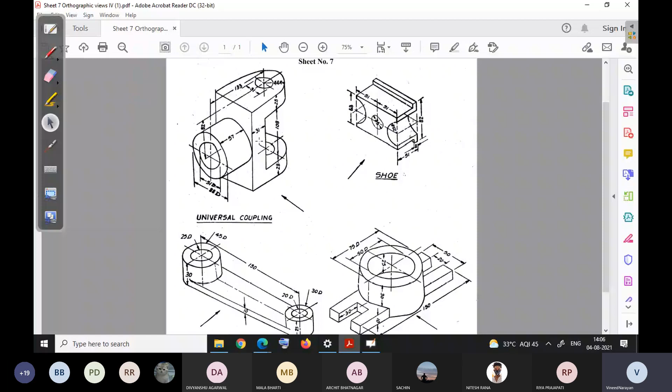Okay. The front view will be the projection of this view. So what are the dimensions available to us? So the height of this coupling can be found out by adding this 108 plus 28 plus 28. Okay. And the width is given as 31, or this thickness is given as 31. Now it will move here.

So we can start with this base. So I can draw first the line of, remember, always drawing the important edges with a thick line and projection lines. Okay. So this is one side and this is the top portion. So the height is, or we can mark it later.

Height of this line is 108 plus 28 plus 28, 56 plus 108, 164. So this height will be 164, and this length of the top line will be, it's not known directly. So what we can do is we can complete that part later.

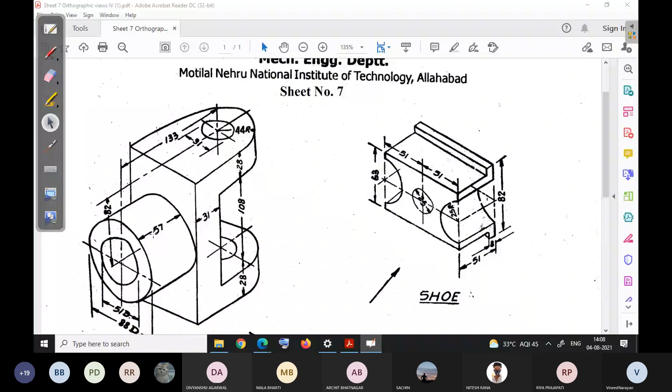We can draw this circular part, or this annular part. It is 57 in length and its diameter is 88. Diameter is given as 88. So this height also will be 88, and length is 57. So this should be at the center.

Because you know that this is 82. Okay, total height is 164. So one half of 164 is 82. So we can confirm that the center of the circle, or the center of this annular shaft or hollow shaft, is the center of the other part of this right hand side. So we can draw a center line. Center lines are also thin lines.

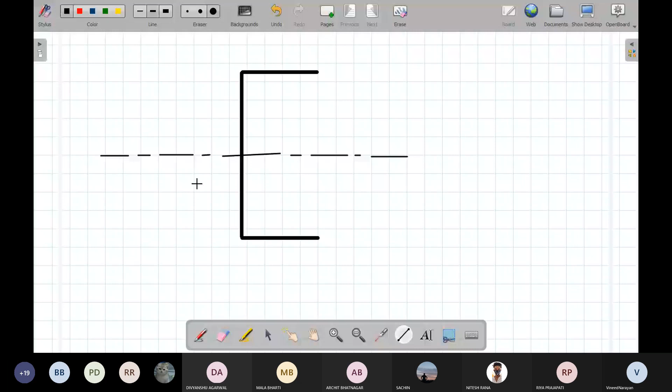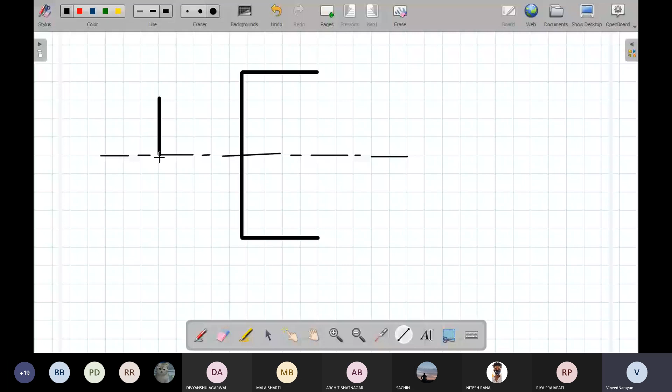In this fashion, we draw center line, and now we have to draw that circular part. So its projection will be a rectangle, and from this point, the length of that circular portion is 57 and diameter is 88. So we can draw 44 from this and 44 towards bottom side. Make this more. The height is 44. Make the second joint.

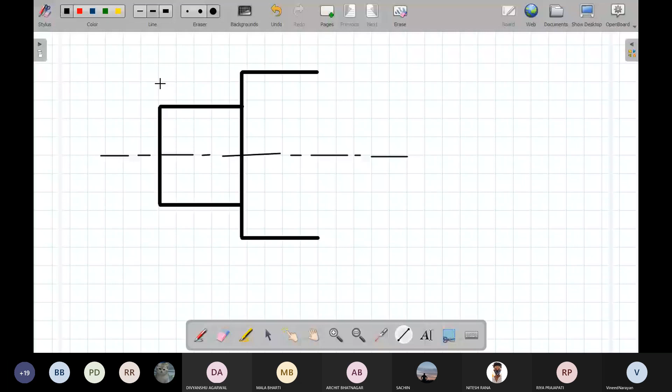So this thickness and this length is 57. Okay. And this diameter we can represent in top view. This is 57, and we can also show the hidden part, or this inner circle is the hidden part. Okay. This is hidden because we cannot see from this side. We will be able to see only the edges of outer circle. Okay.

So that hidden circle diameter is 51. Okay. So radius you can take 25. Actually it is 25.5, but you cannot take 0.5 because your scale or the measuring device cannot, or the least count of your scale is 1 mm. So it is difficult for you to represent 25.5.

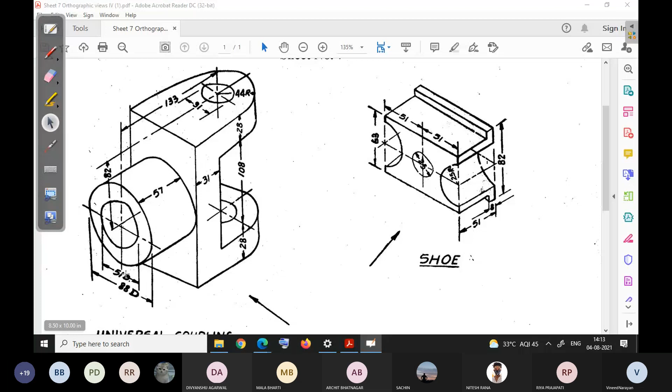Here you can see diameter is 51. So to draw this circle, you have to use a compass of radius 25.5. So 0.5 we cannot find out from your scale. For that you need either some other scale which can show 0.5, or least count is either less than or equal to 0.5. So don't write 0.5 in your drawing if your least count is 1 mm. Okay. So these things you must remember.

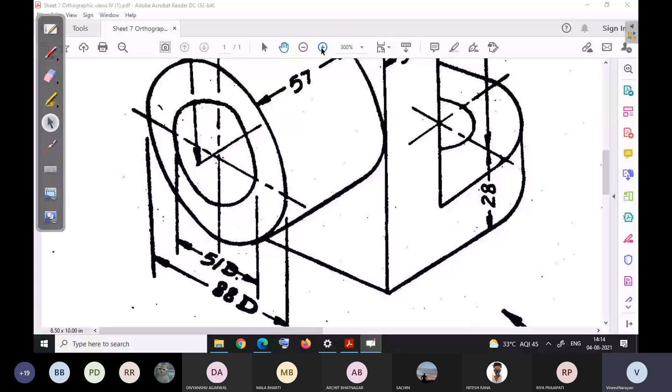You cannot measure 0.5 with the scale which is having least count of 1. So in this case, we can take 25 from bottom and 25 from the top, and can draw the hidden part. Okay, later we can mark it as 51 itself. Don't do it. Don't write it as 50.

Now other measurements which is given in the question is 133 from this edge. So the center of this circle is 133 mm from this edge, and both the circles are in same axis. So you can take

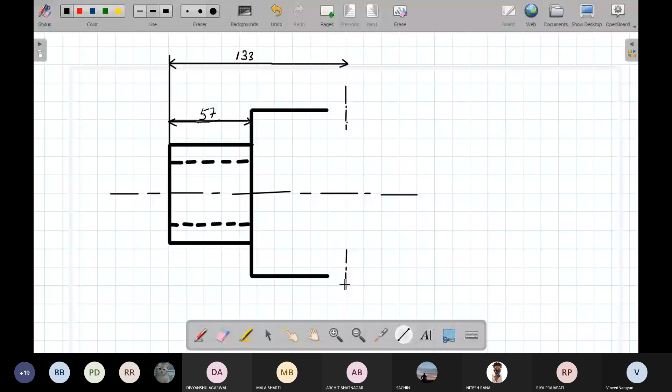let's say this is 1 circle given to us. Now you can draw center line which is passing through the center of the circle, and also you can draw to here. So this is only up to the center of the circle. Then after that you have to draw another 44 mm because it's given that radius of this part is 44. So you can draw another 44.

Now this height is 28 and you can draw complete. And this one is 31. So if you know that is 31, you can draw a line. Okay.

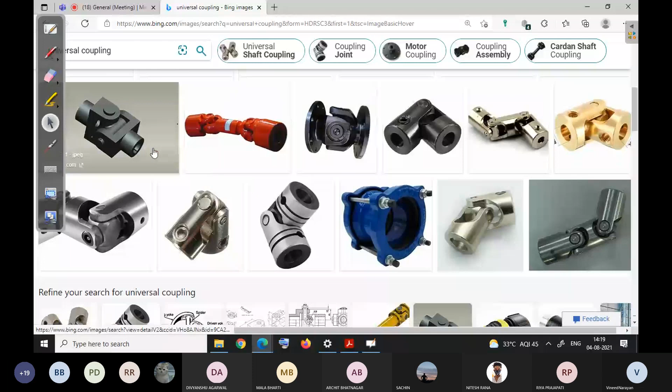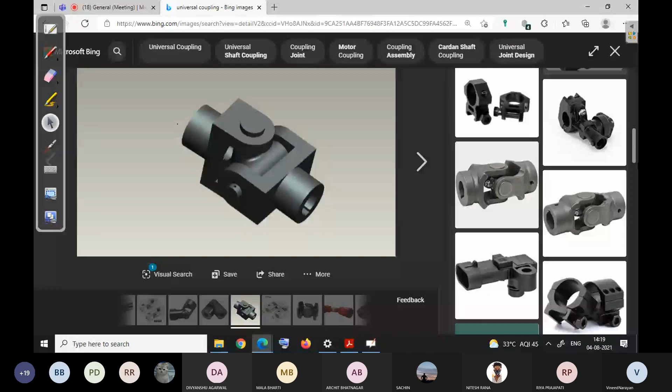So this is actually a coupling. You want to see the device. It's something like this. It's used to transmit power from one shaft to another shaft which are intersecting. So we are drawing only a part. Later we will do complete assembly in the later part of the course. There are different types of couplings. That's what we are trying to draw here. Only one part.

Now here this hidden part also you can draw. The circle. Its diameter is 31. So this 31 you can easily take with your scale from one point. The center portion should pass through 15, half of it. And all these measurements you can represent. Remember, measurements also need to be shown with the thin lines.

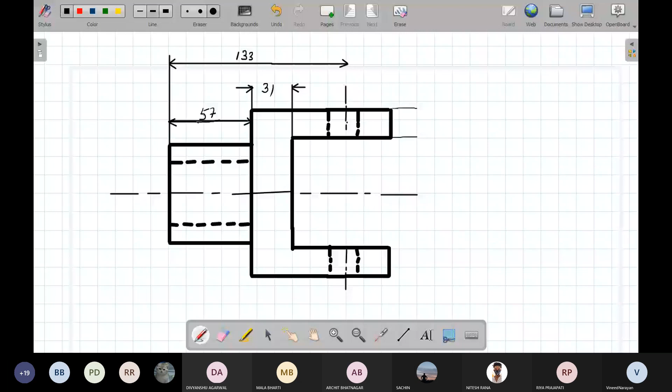This is 31. This one is 28. So we need to show minimum number of dimensions so that this can be replicated. So in the top view, or you can always start from top view because it's easy to draw with top view in this particular example. So if we start with the top view, in this case I can project, or if you are not projecting, you can always start with the top view and then you can project to the front view. That is also okay.

That will be very easy if you draw two parallel lines. Let's take these two parallel lines, very thin lines, and pick these two lines 88 mm apart, and this thickness is not given, but you can assume that this circle and this line are tangent. Okay, then this will also be 88. Okay,

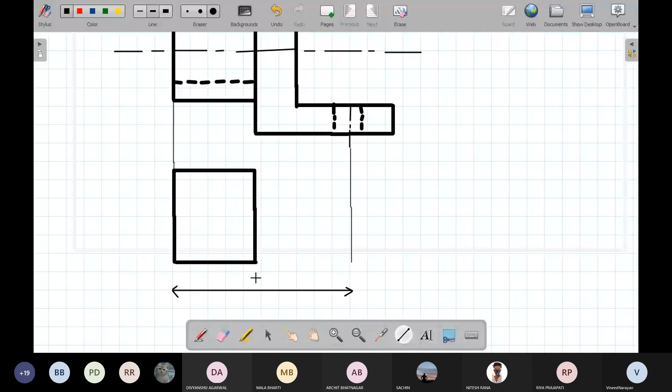then so if we start from top view, in that case we need to know this, and that is given as 133. After that we can complete this portion up to here. So this total length is 133 and height is

Please use scale for dimensioning line also, since some students are still using freehand. This is 88.

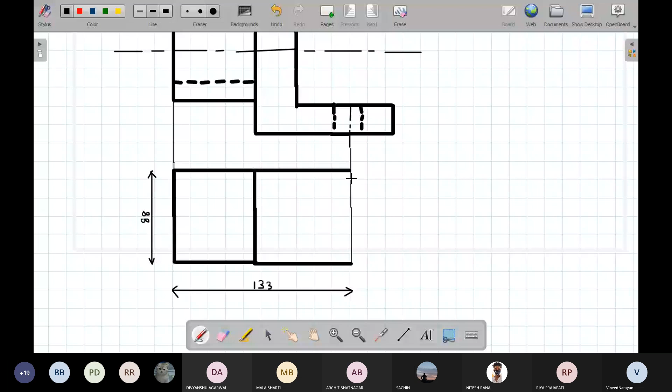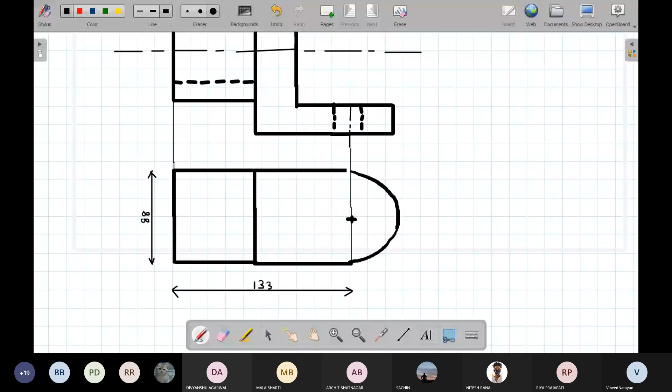So please follow uniformity. If you are writing above line, write always above line. Now you can take a compass and draw an arc or semicircle of radius 44. And then the inner circle diameter is 31. And that also you can draw. And then you can show the center line, which is the line of symmetry.

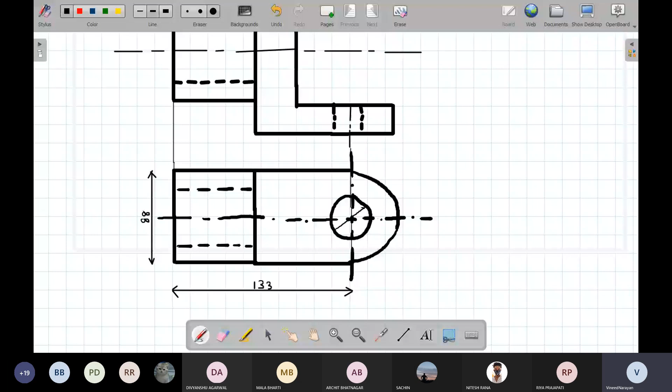The central line is also passing through the center of the circle. So you can show here also hidden bar. So in this case you can show the diameter of the circle in this fashion. It was around 31. And right here, 31 D. Then the radius of this part, 44. Yes, for R.

So after drawing top view, you can project to front view also. There is no problem in that. That will be better, I guess, because drawing this part is easier compared to the front view. So after drawing this top view, you can project it. You can project this line. You can project the tangent. Since I have not used a drafter, they are not becoming parallel, but you have to use instruments.

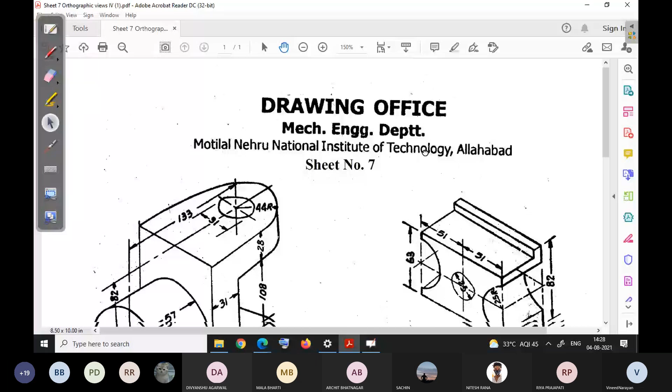Same way you can draw any side view. Either it can go with left hand side view or right hand side. So I guess things are clear with these two pictures itself, top view and front view. But for more clarity, you can add one side view also. Mentioned in question. Okay, you can draw front view, top view, and one side view, either left or right. So draw such a way that minimum number of hidden lines appears.

So if you draw in the first case right hand side view, that is looking from this side, it will create a lot of hidden lines. That is not recommended. So it's better you look from left side, and more edges are visible if you look from the left side. So better draw left side. So yes, we need a side view also because whether this part is circular or rectangular is not very clear from these views. So we need to go for left hand side view. So you can always project now because you have both the views. Projection lines are very thin lines.

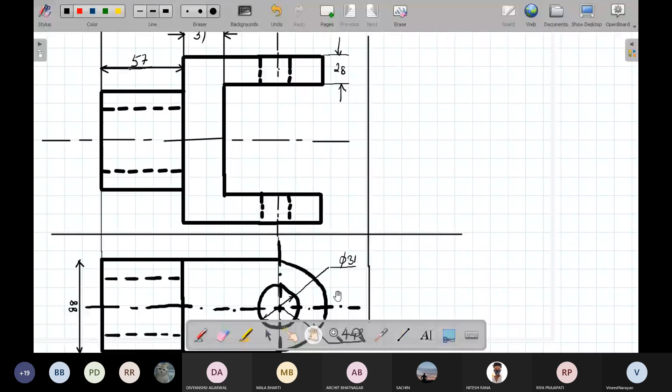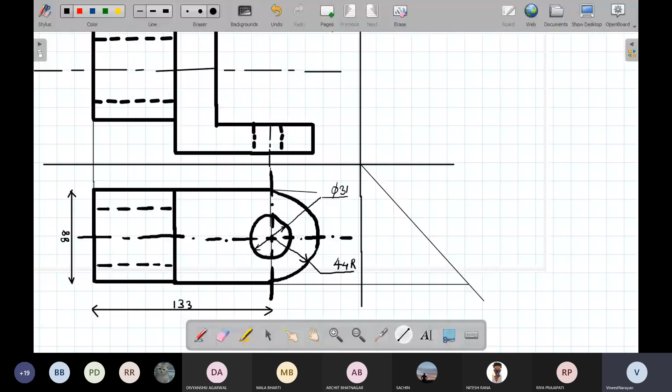For projection, you can draw a 45-degree line. Okay. And we have sufficient number of lines. Project. So center will come somewhere here. So this is one center line. And complete it. Okay. And other hidden parts also we can do.

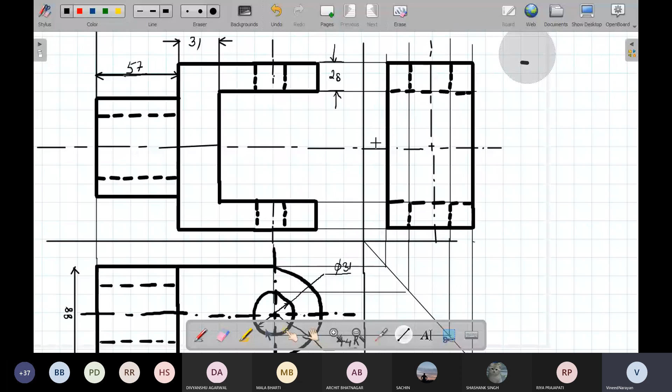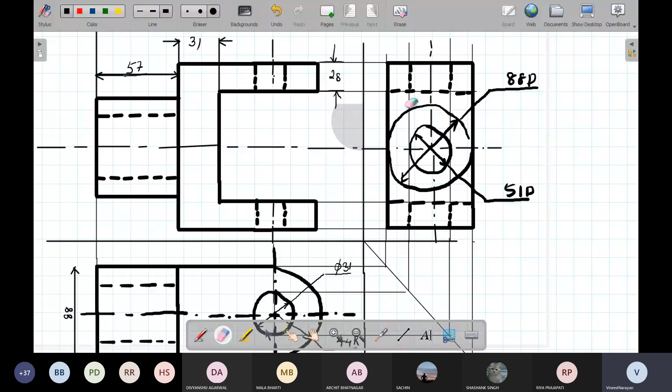The circle we can show like this, and also the inner circle. We can show the diameter here also. 88. And the inner one is 51. Okay. So far, any doubt in drawing this? So this dimension line should not be this thick. The left hand side view which I have drawn should be thin.

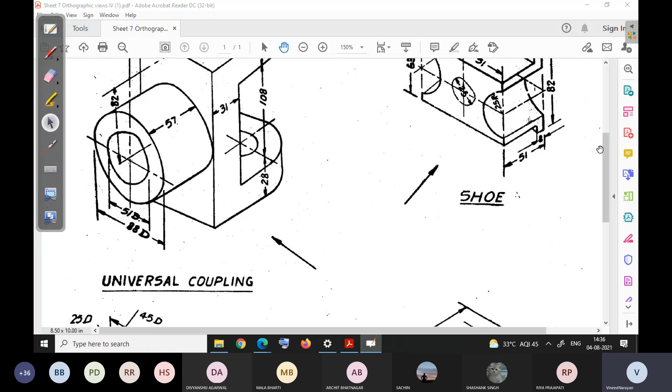I think most of the parts are shown in this. And I have also returned the previous sheet, one of the sheets. Please go through that, and if you suspect you deserve more marks, let me know. So you can complete this drawing and submit. I think this one will be a little tedious one, this crank arm. Take more time. Other drawings are simple.

So can you repeat what you were saying? Which portion about this drawing? This one. Hello, sir. Am I audible? Yes, sir. There is some disturbance, so I can't hear you properly. What were you saying? Here some construction work is going on.

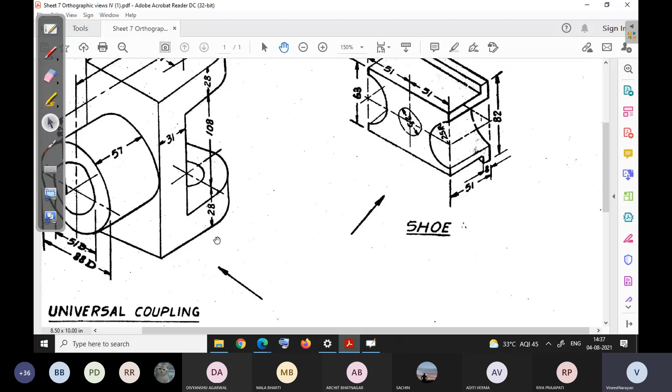Okay, so I was telling that this universal coupling is over. Now this crank arm is a bit difficult. Means it takes some time for you. Other parts are easier. That's what I was telling. So you can submit it by tonight. That's what I was saying. No need to give 2 days, right? So we have to do all the 4 questions? You want to reduce the load.

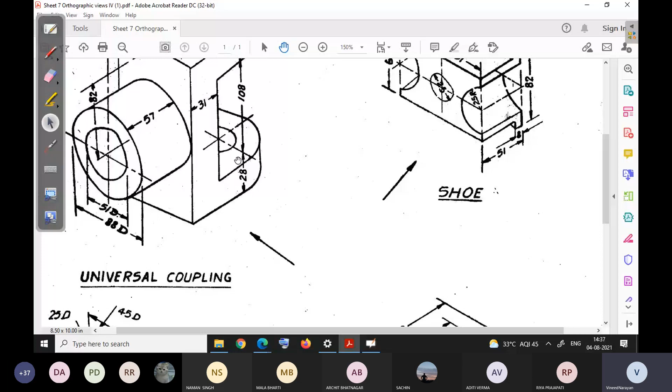Okay. So anyway, universal coupling is simple that you can do, and this crank arm, this is also possible. This is quite difficult, but you have to draw this. Okay, you can avoid this iron casting, the last one. In place of that, shoe is simple. First, second, and third one you can do. Thank you, sir.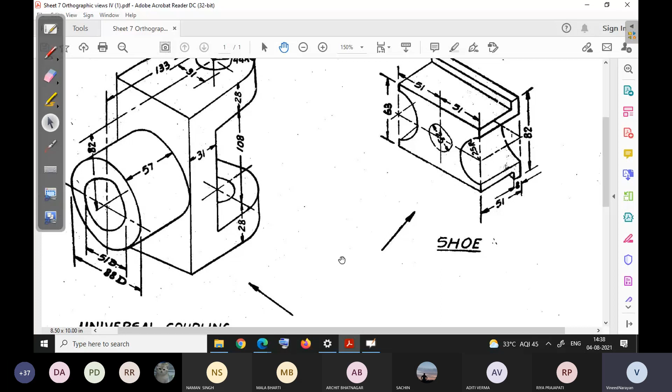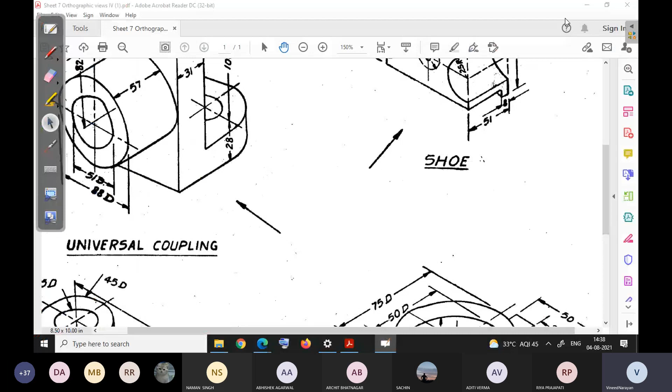So we have to make a right side or left side view? Actually, it's not given in the question, so you can either draw right or left. But remember, try to show maximum edges. See, if you look from the right side, in this case, these edges are not visible, right? So in this case, if you choose the left side view, it will be better. So you can show here top view, front view, and left hand side view in this case.

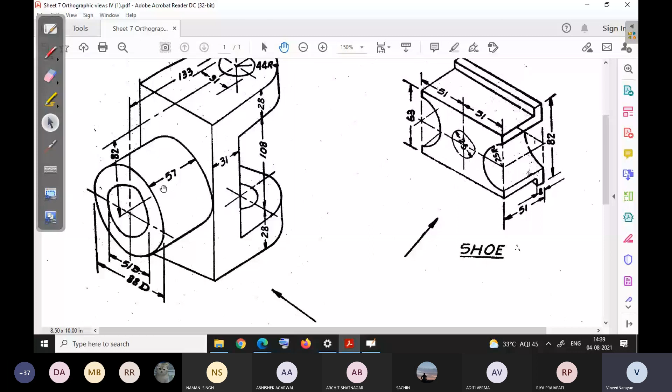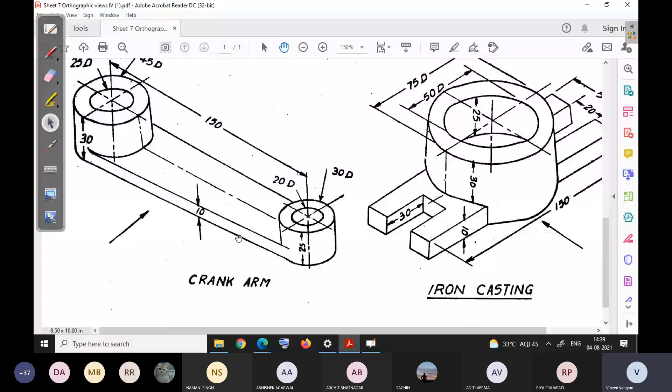And in this crank arm, front view needed, top view also needed. In this case, right hand side view will be better because this part is shorter. Otherwise, if you look from the other side, a lot of hidden parts will be appearing. So better you draw right hand side view for crank arm. It is okay to draw left side view also, but the problem is a lot of hidden parts will be appearing. Then those who are reading may find it difficult. Too many hidden parts are there.

In this case, shoe. I think it's symmetrical, so you can go for either left side or right side. In this case, top view will give less information. But okay, you can do.